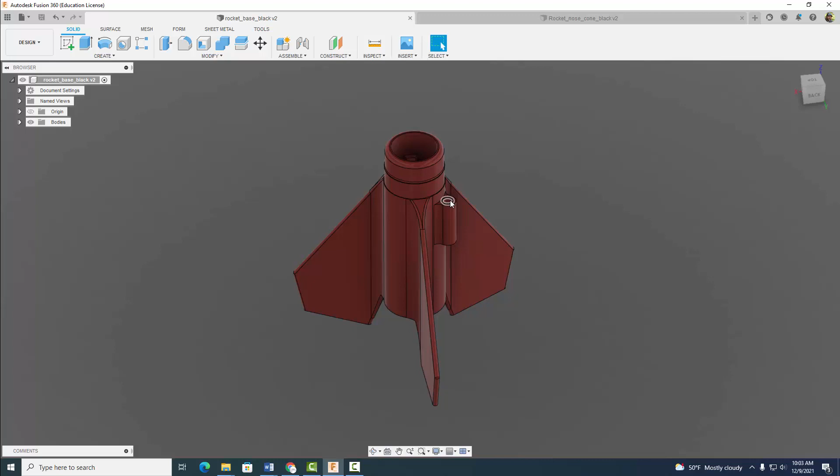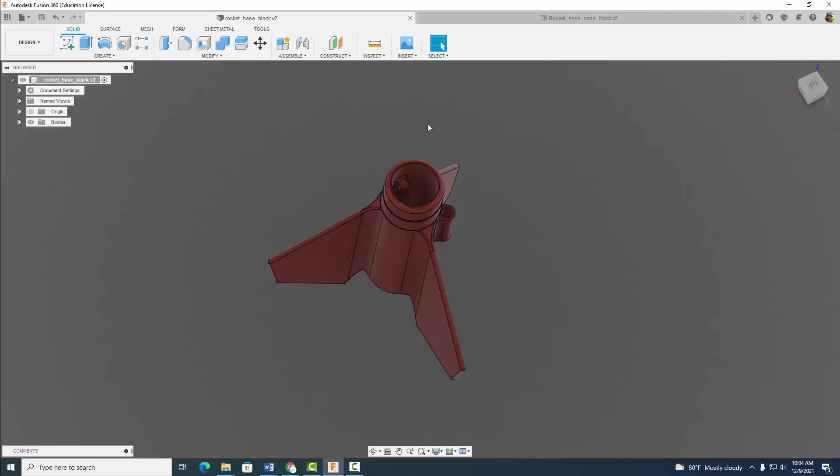The other mechanism we want to make sure that we have is this sort of stopper mechanism right here, or governor, if you will. And this will stop our engine when we launch it. When we put our engine in here, it'll stop our engine from moving up into our rocket. So this will act as a prevention mechanism so our engine does not shoot up into our rocket, and it will hold our engine in place. All right, so let's go ahead and get started.

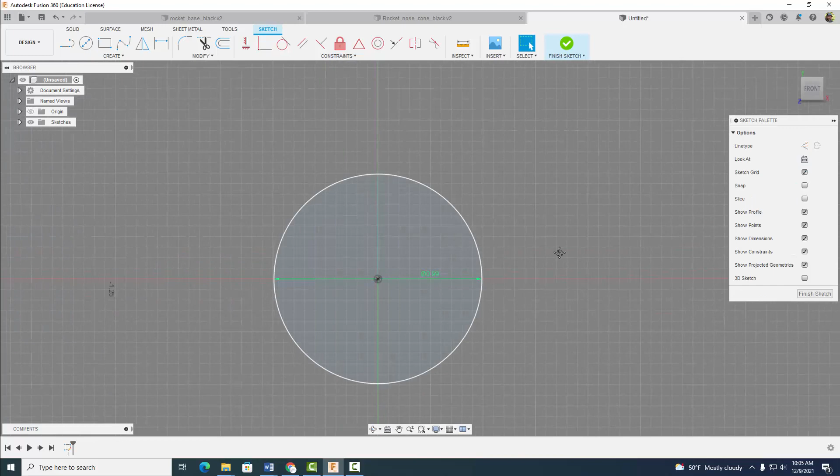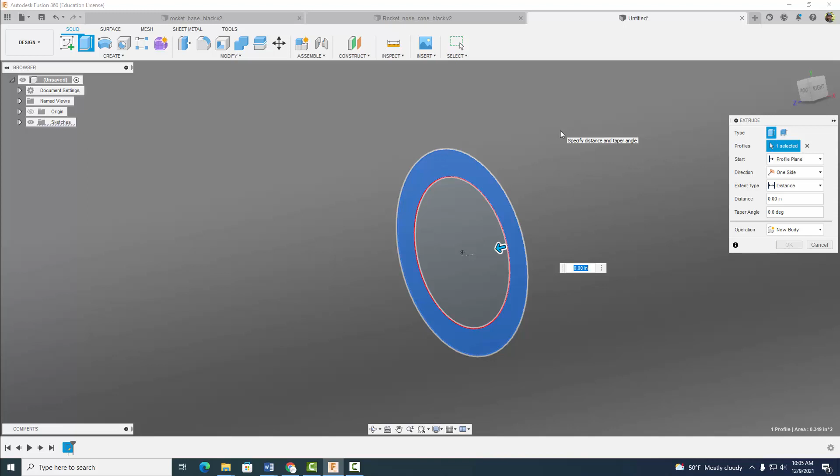Let's do a file, new design, and we're going to start a sketch on our XY plane. We're going to create a cylinder object here, and drag out a circle with a diameter of 0.99 inches. I'm going to zoom in, and then drag out a second circle with a diameter of 0.732 inches. We're going to finish our sketch, and it's important that you get this inner diameter right so our engine fits in it. We're going to extrude out this portion a distance of 2.4 inches. Hit OK.

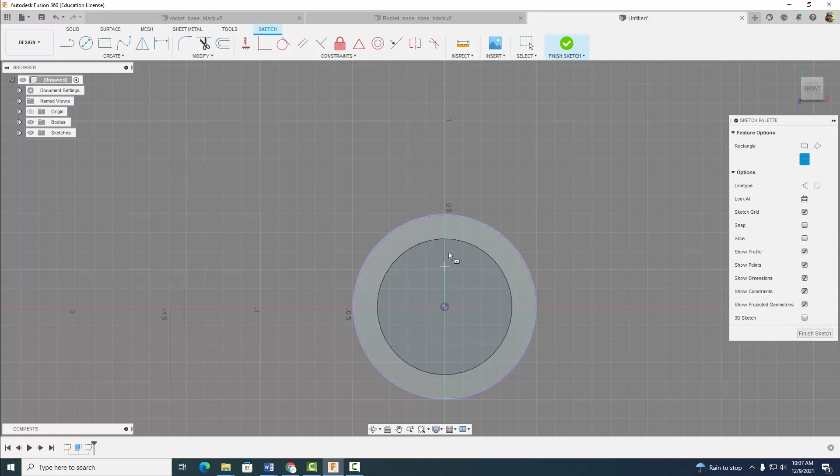Next, we're going to start a sketch on this surface, and project some geometry on this outer circle. Select OK, and then we're going to create a center rectangle. We're going to come straight up to here and drag out a rectangle that looks something like that. Then we're going to trim all of this stuff. And let's trim those two.

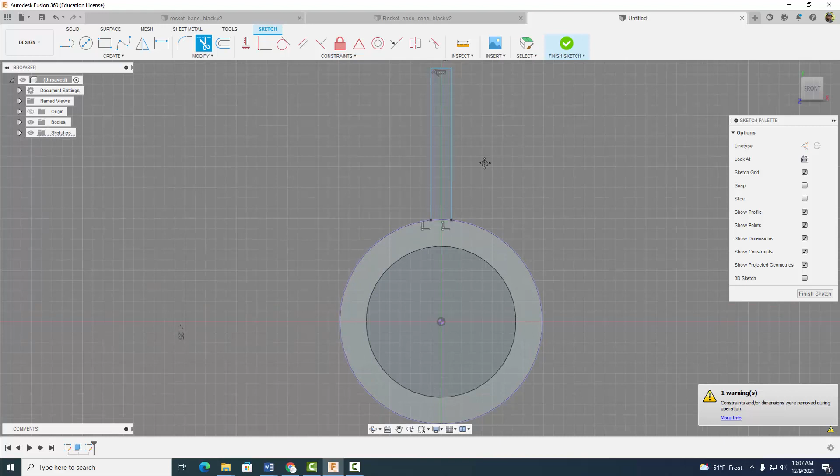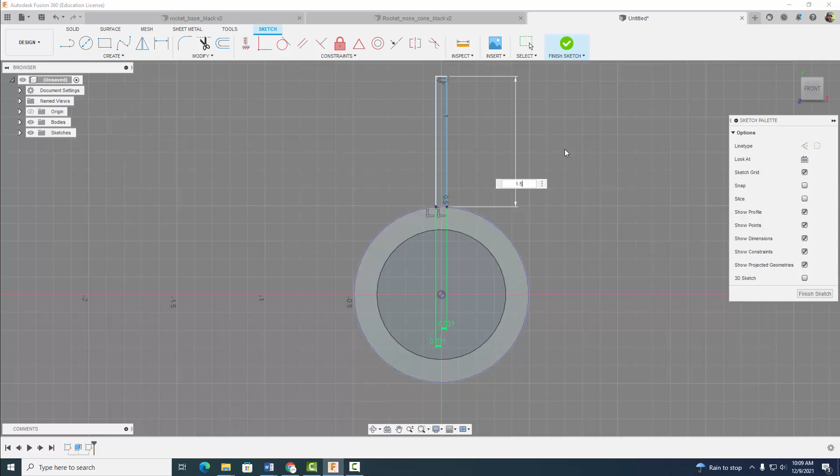The next dimension we're going to add is from this circle to the center here. We want this distance to be 0.0625 divided by 2, or 1/32 of an inch. Same thing on this side: 0.0625 divided by 2. Looks pretty good. Next we want to dimension from here to here. We want this distance to be 1.56 inches. All right, looks pretty good.

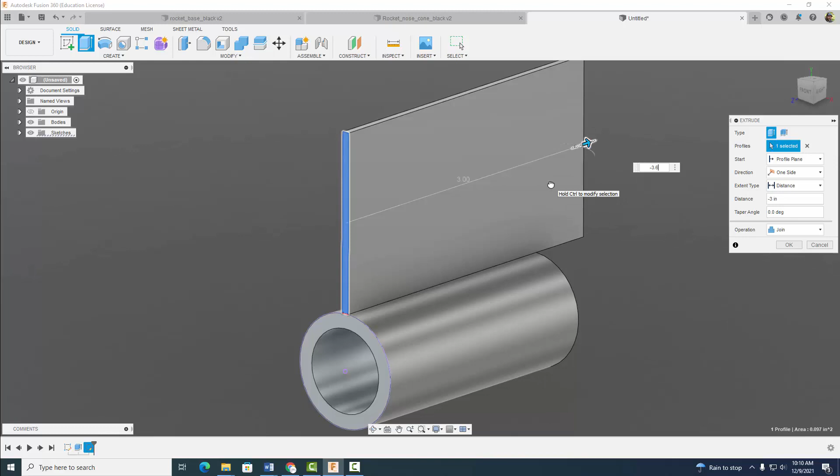Now let's finish our sketch, and we're going to extrude these squares out here. This is going to be one of our fins, and we want this distance to go the other way, a distance of minus 3 inches, and select OK. Now we're going to customize our rocket fin. You're probably like, well, I don't really want a big square looking fin. It's kind of ugly. So let's change that and make it look a little bit more appealing.

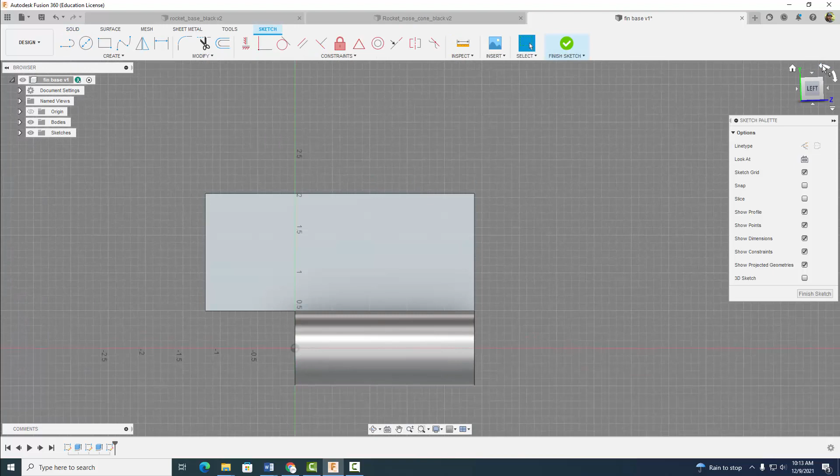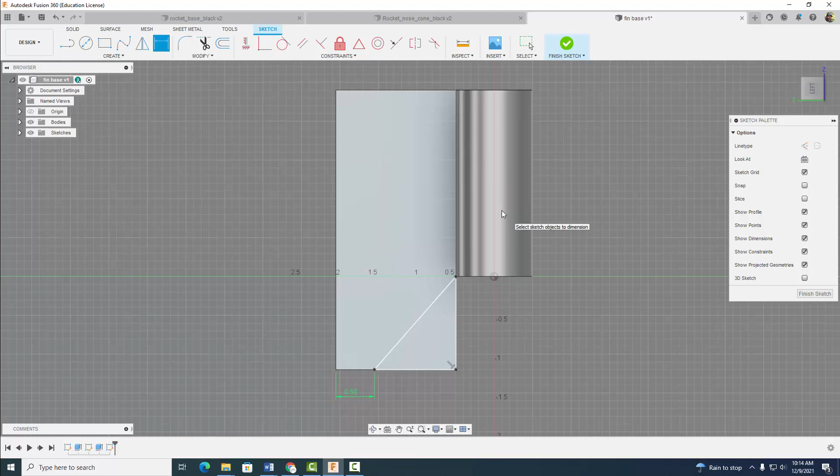Let's start a sketch on this surface. I'm going to rotate it around and project some geometry. That guy. I'm going to come with my line tool, find this point right here, come down over here, and draw out a triangle that looks something like this. I'm going to dimension this distance from here to here. Let's make that 1/2 inch. Then I'm going to finish my sketch, and extrude this guy minus 0.0625 inches and hit OK.

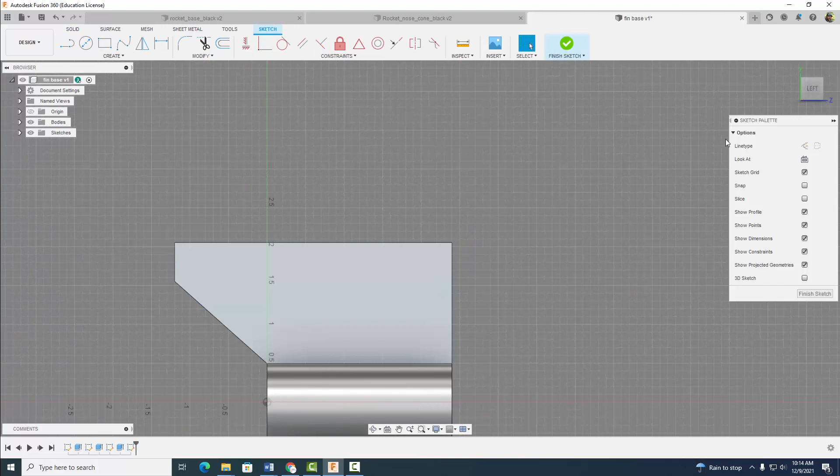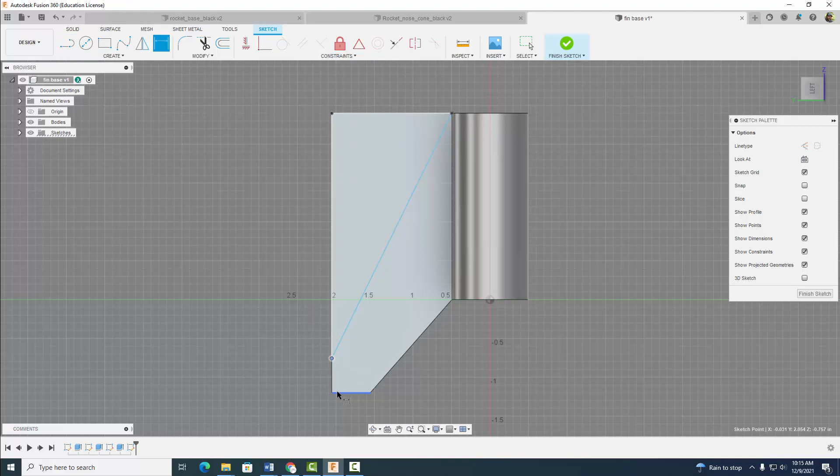Now let's make another modification on our fin. I'm going to start yet another sketch on the same surface, and once again project geometry. I'm going to grab my line tool, come up to this corner, and do the same thing down here. I'm going to come down, draw out another triangle, and once again dimension this distance to be 0.5. Finish my sketch, and then we're going to extrude and cut away this portion, a distance of minus 0.0625. Hit enter. So we have one fin done. Well, close to being done.

If you're in my class and you're making this rocket, you don't want your fin to look just like mine. You want your fin to be unique. That's where your creativity comes in. Create a rocket fin base that's innovative and unique and something that you thought of. All right.

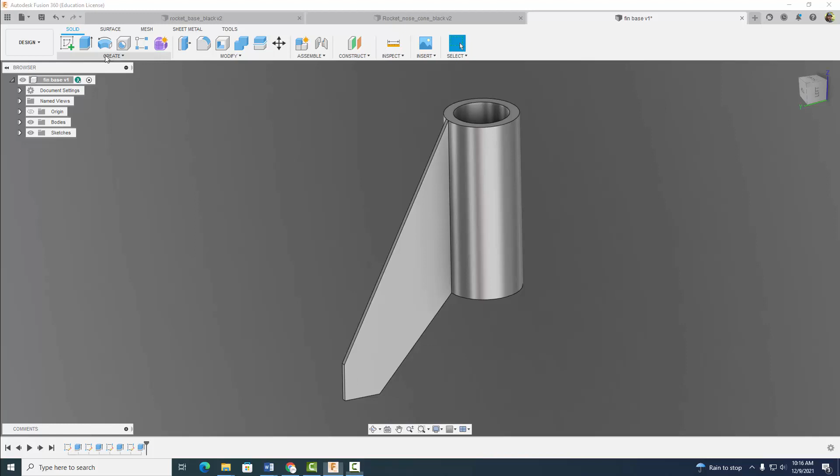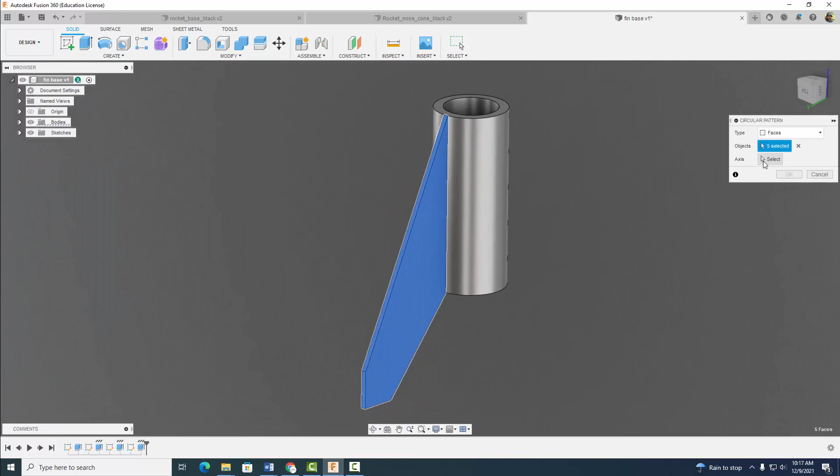And if you've ever looked at model rockets, you'll know that they have basically between 3 and 4 fins. I'm going to add 3. So I'm going to come over here to create and we're going to do a pattern. We're going to do our circular pattern and we're going to click on that surface, that face. Make sure you select face, that face, and that face. Okay. And then we're going to select our axis and we're going to select 3 and then hit OK. Okay, and now we have these 3 fins here on our rocket.

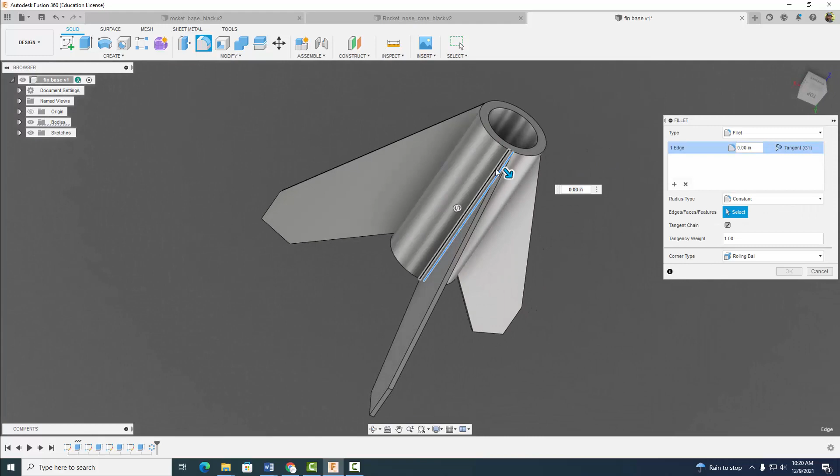Looking pretty good. And if you actually launch these, there's a good chance the fins are going to break. So let's increase the structural integrity of this guy, and we're just going to slap some fillets here around each fin just to make it a little stronger. And we're going to make those fillet sizes 0.125. There we go. Select OK.

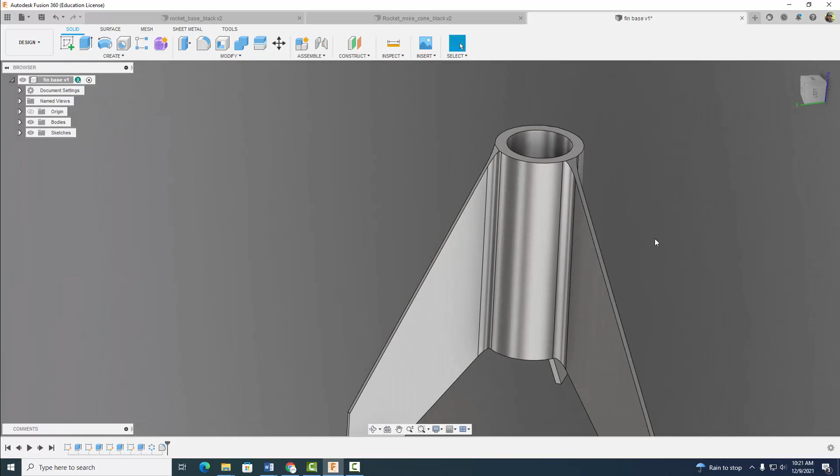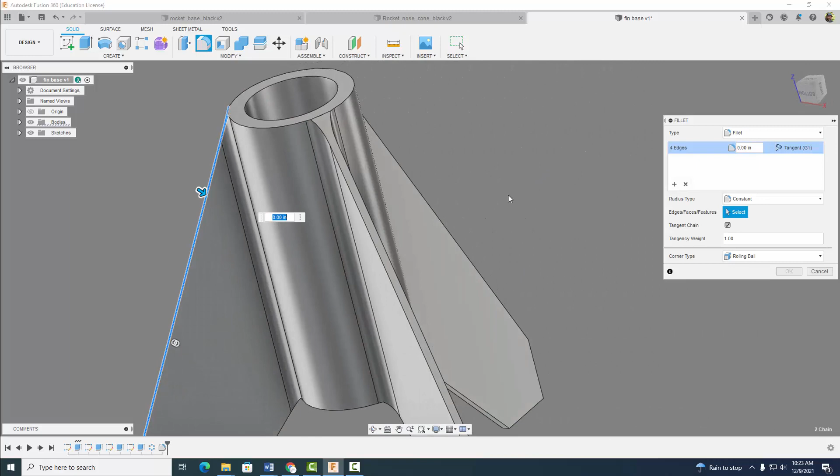And to make our rocket a little more aerodynamic, we're going to smooth out these flat surfaces here on our fins. So we're going to come on back to modify and we're going to add yet another fillet, one there, and we're going to make them 0.03. Okay, so I'm going to go around and click on all of them here. Looks pretty good. Select OK.

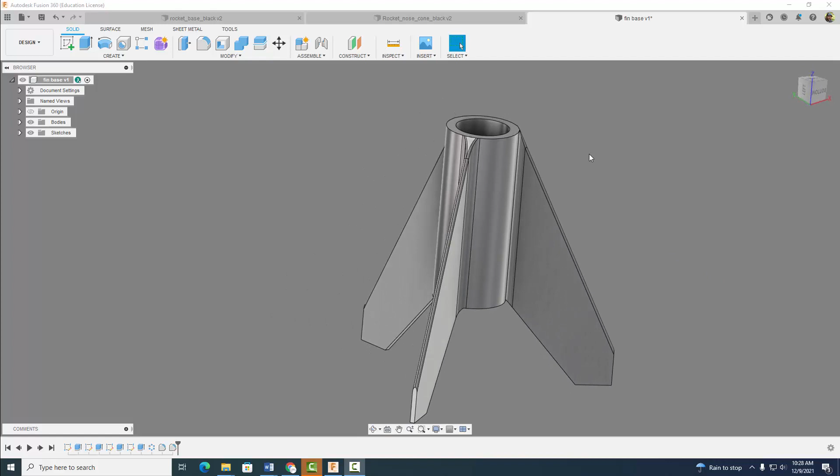All right, now you want to go ahead and create a launch lug so we can actually launch our rocket using the guide rod. So I'm going to start a sketch right here. Okay, and somewhere kind of out and over here. That's a little better. Actually, let's do it right out here, and we're going to make this circle have a diameter of 0.177.

Okay, and I'm going to come up to my tangent constraint, and I'm just going to make this tangent to that. Okay, and then I'm going to start here at the center, and I'm going to drag out another circle with a diameter of 0.25 and select enter. Okay, and I want to make sure this is equal distance between these 2 fins here. All right, next thing we want to do now is to center this guy so it's between these 2 fins. Well, we know it's 120 degrees between these 2 fins.

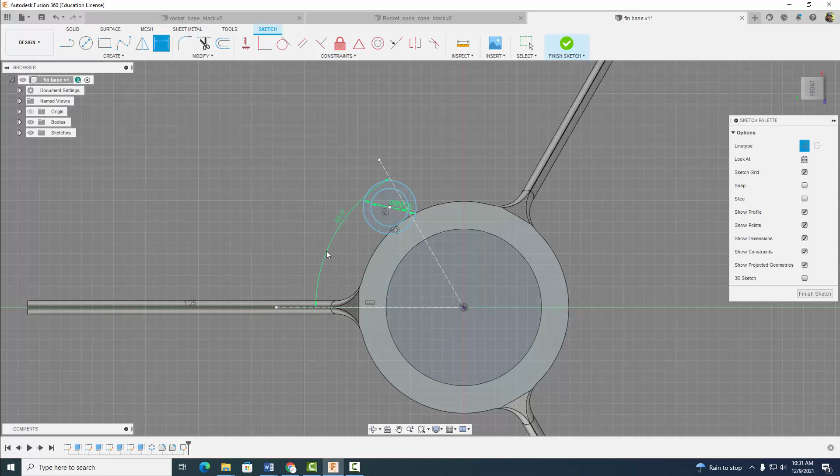So I'm going to click on my construction line here and I'm going to create 2 construction lines. I'm going to make one come out here. Okay, I'm going to hit escape and draw another one out here, and I'm going to dimension the angle between these to be 60 degrees. Enter. And then I'm going to come over here to my coincident constraint and I want to click the center of the circle and make sure it's on that line. And there we go. Now we know it's perfectly centered.

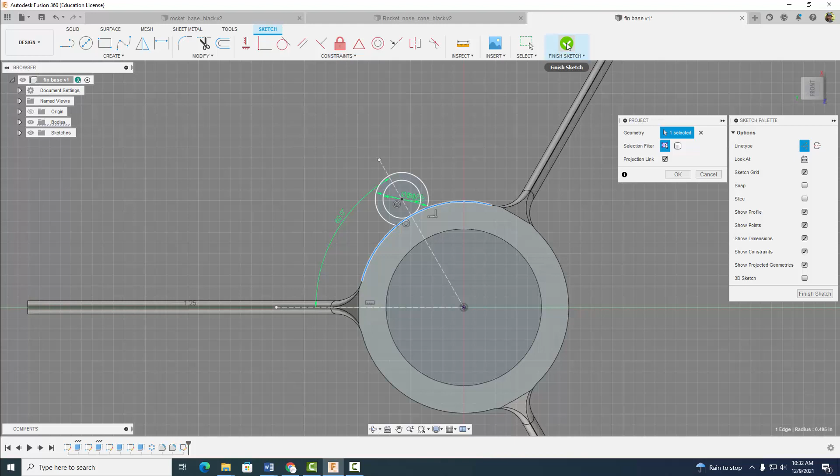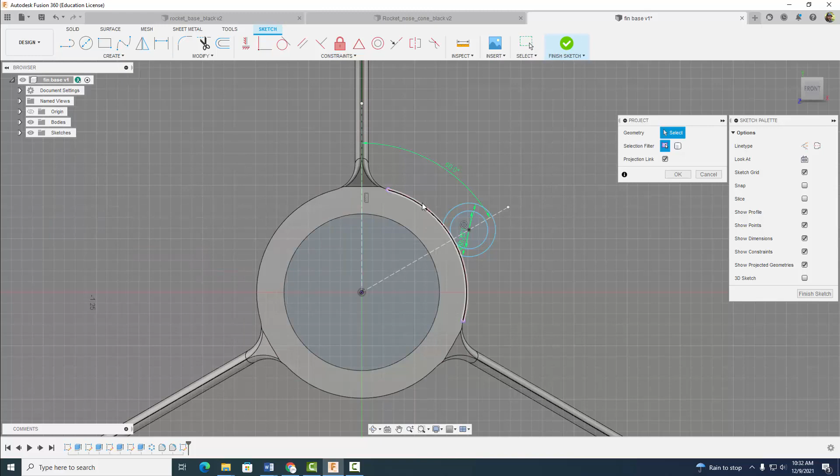All right. Looks good. I'm going to go ahead and finish my, actually no, I'm sorry. Let's trim that guy and that guy. I'm going to come over here to create and we're going to project this guy. We're going to finish our sketch. Actually, let me go back into my sketch. My bad. I made this a construction projection. So let's not do that. Let's project again. Make sure your construction line is off. Go to project and now do it and you should be good. Now let's finish our sketch.

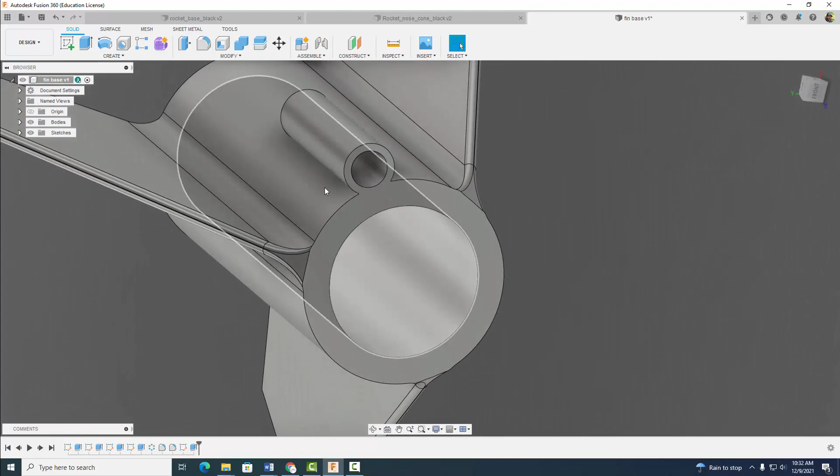Okay, and we're going to extrude this out a distance of 1 inch, -1, and select OK. All right, and then to make this guy a little stronger, once again, we're going to just put 2 fillets on there and we're going to make them with a distance of 0.125. Select OK.

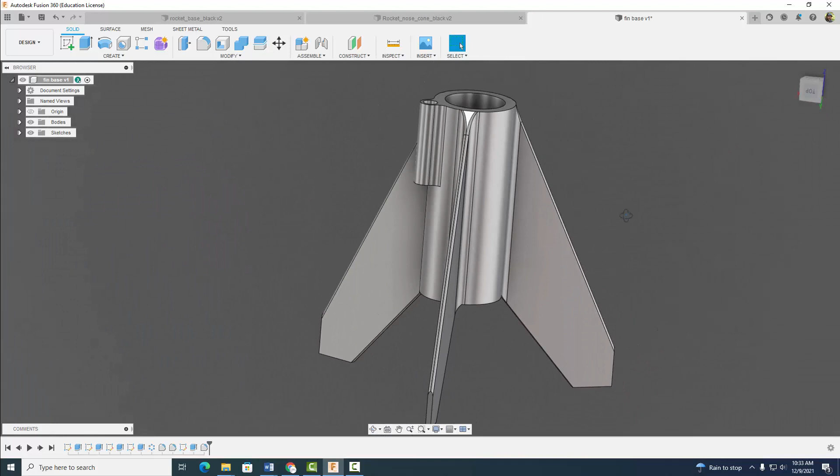Okay. It's very important that you design a launch lug so you can slide this onto the guide rod and your rocket has a perfectly vertical straight up trajectory. And you want to make sure this hole is definitely big enough. Okay. All right, and the next thing we're going to do is start a sketch right here on this surface. Okay, and again we're going to project some geometry.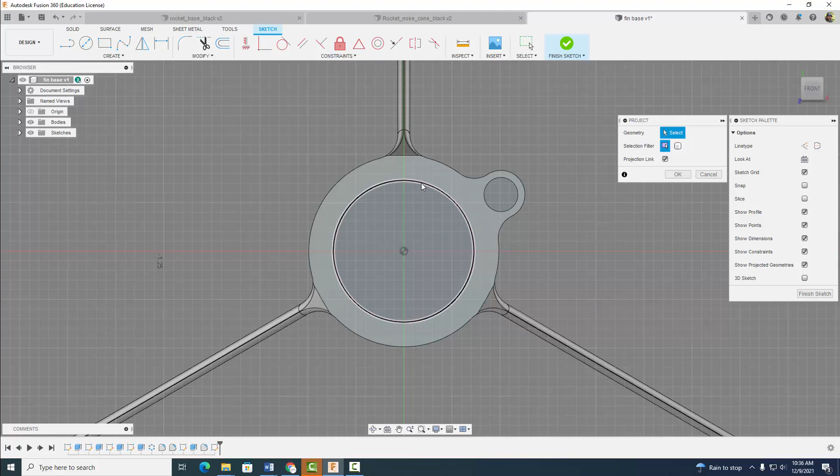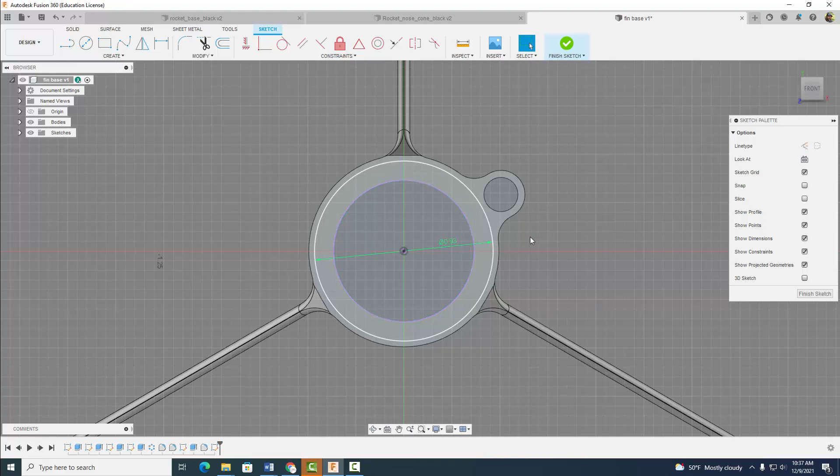We're going to project this circle, and then we're going to draw out another circle with a diameter here of 0.93. There we go. And it's very important that you get this dimension correct because this dimension will fit on that cardboard tube. It'll have a nice, good little press fit. If you don't, your cardboard tube might be too loose, and you might have some issues. So after that's done, let's go ahead and finish our sketch, and we're just going to extrude this portion out right here, a distance of 0.67 inches.

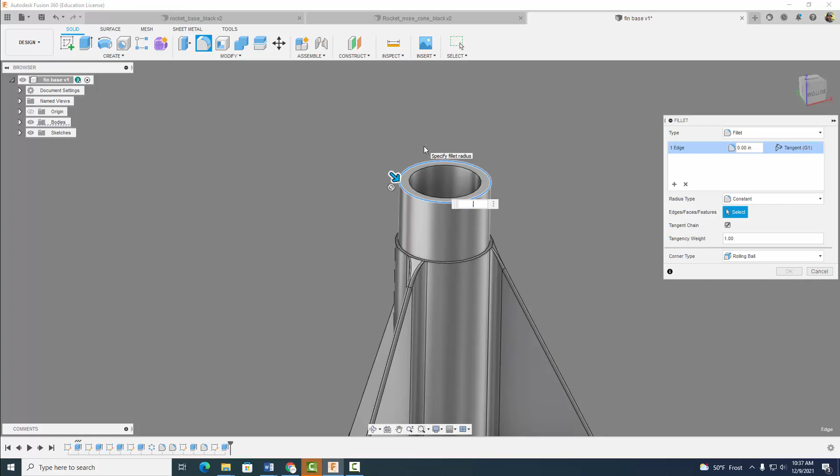Select OK, and like I said, we're eventually going to slide a cardboard tube over this. To make it a little easier, we're going to round this edge off with a 0.125 fillet. Hit OK.

Now we're going to create this little rib feature here, so when we slide our cardboard tube over, there's a nice seal, and it stays on very firmly attached to our model rocket base.

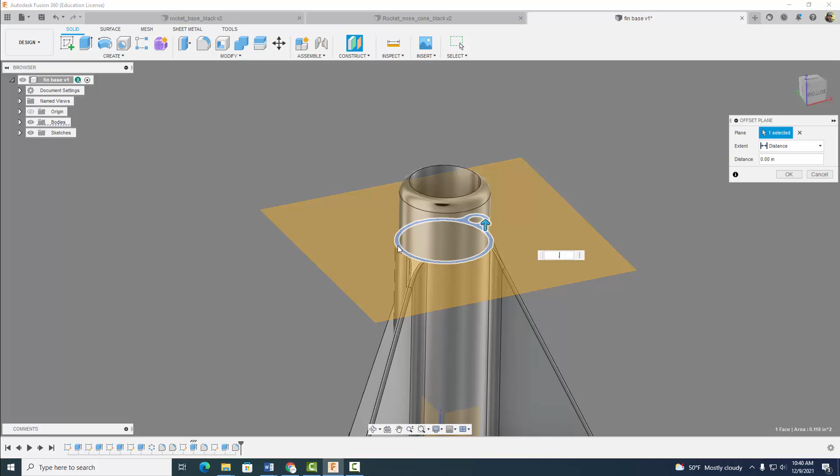I'm going to construct a plane offset from this one, a distance of 0.3. I'll start a sketch on that plane, project some geometry, that circle, and draw out another circle.

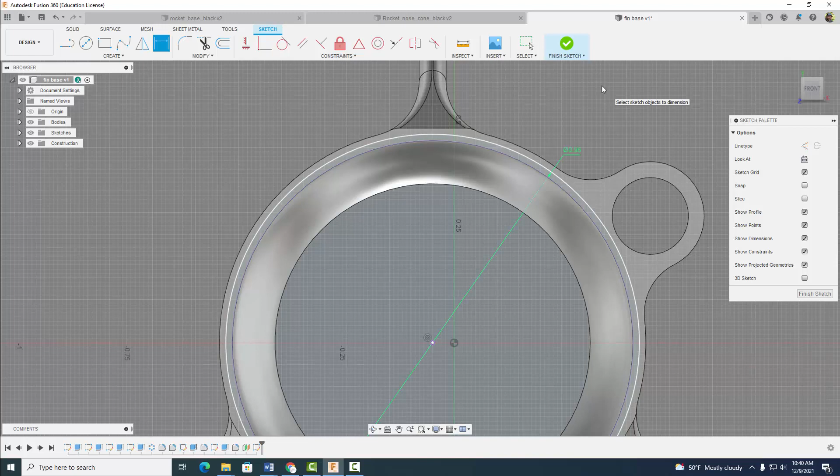I want this diameter here to be 0.96 inches. Now let's finish the sketch.

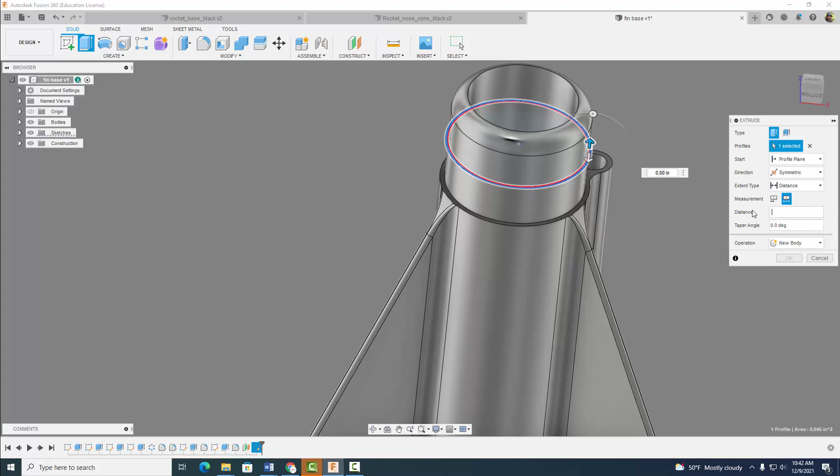Now let's extrude this little tiny feature right here. I'll click right there, go symmetrical, click on whole length, and do a distance of 0.03, then hit OK.

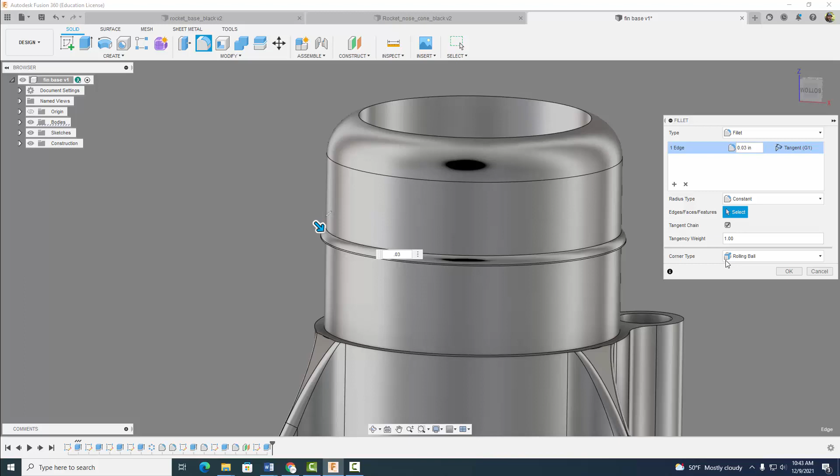This is kind of an abrupt edge here, so let's smooth it out so our cardboard tube slides on with ease. I'll click right there and make that 0.03, then hit OK. Why are we doing this? So when we slide our cardboard tube on, we get a nice press fit, and the tube won't slide off this piece.

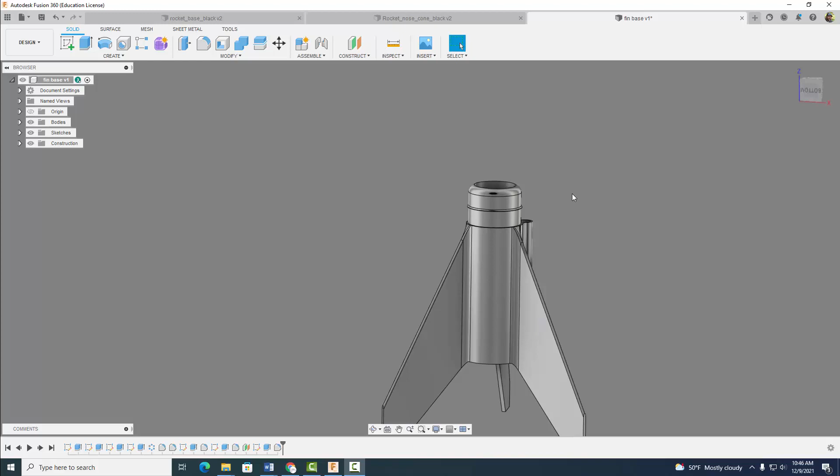So when we go to launch it, our rocket doesn't fall apart, and everything stays on with a very firm, tight fit. Next, we need to create some sort of stopping mechanism for our engine. This is very important for my class when we launch these, so your rocket stays in place.

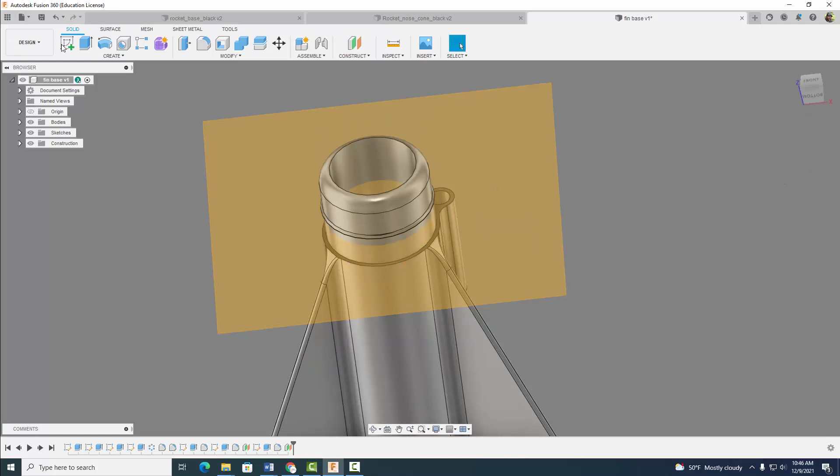To start making this, we'll do a plane offset from this surface, a distance of 0.2 inches. Select OK, and start a sketch on this surface. I'll zoom in, come down to create, and project again this line right here.

We're going to come over to a 2-point center rectangle. I'll start it right here and draw out a square, something like that, and then we'll trim this stuff.

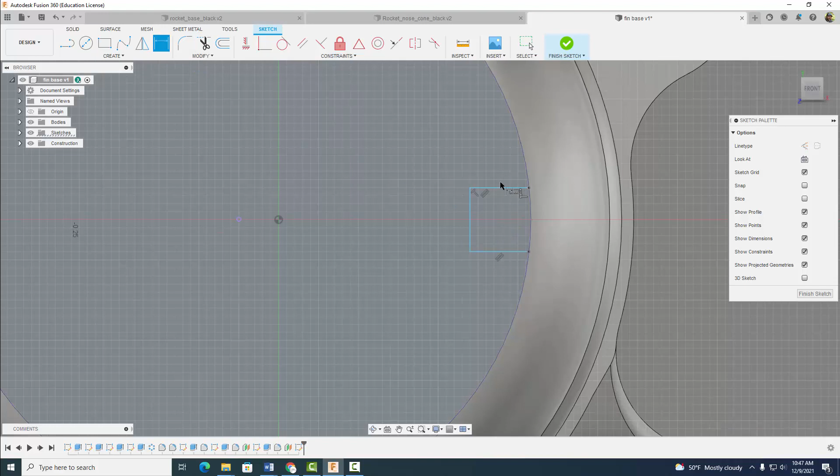Now we're going to throw on some dimensions here. We'll make this dimension from here to here 0.06, and the same thing on the other side so it's symmetrical, 0.06. From here to here, our center, we'll make that distance 0.2. Enter, and that looks good.

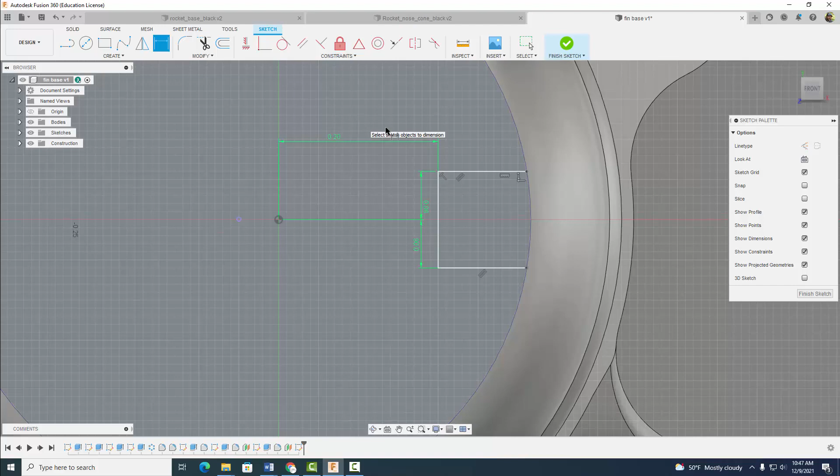Let's finish our sketch and extrude this guy out now. Once again, symmetrical both ways, a distance of 0.15, hit OK, and then we're going to add some fillets.

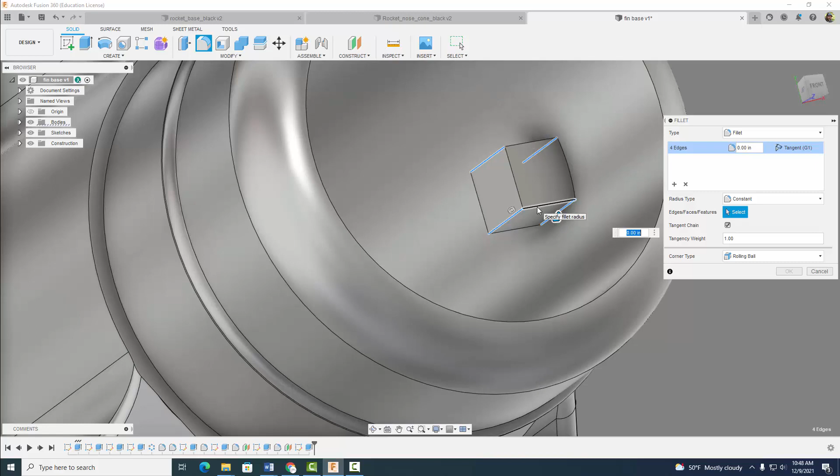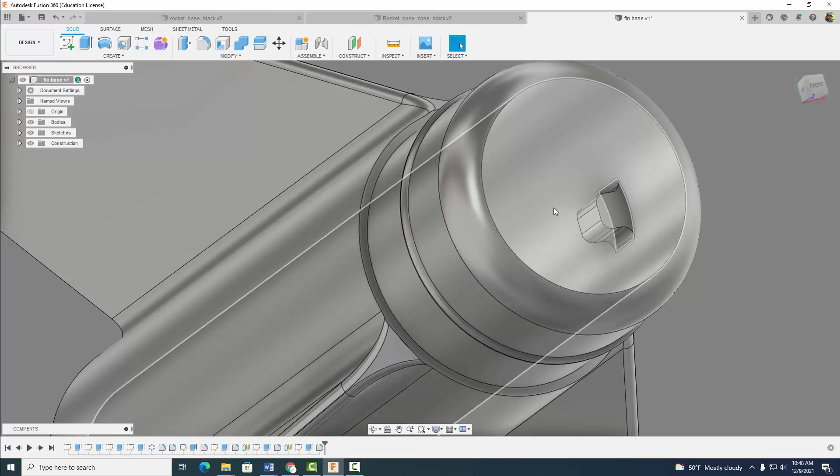Right here, right here, right there, and right there, we want those fillets to be 0.035 inches. So it looks something like that, and we want this piece strong so we don't want it to break off. When we push our rocket engine in here, it will rest up against this feature, preventing our rocket engine from moving around. So it's a very important feature.

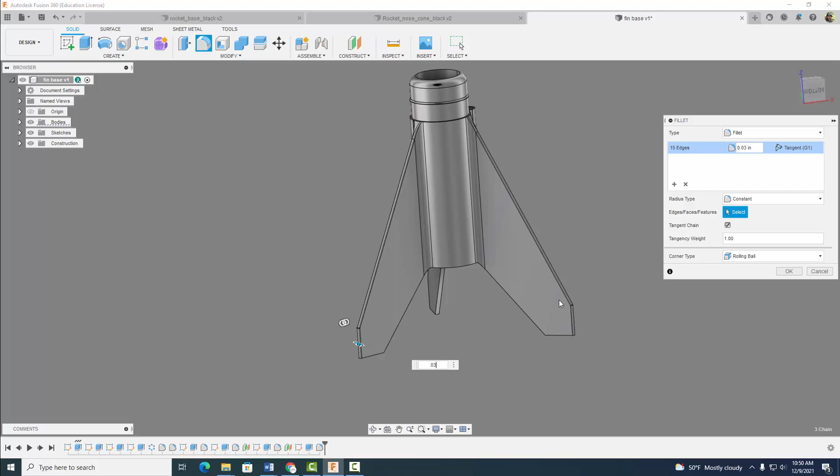Finally, just to be consistent, I'm going to add one more little fillet on these edges right here, and we'll make those 0.03. I'll hit OK.

Now we're looking pretty good. If you're 3D printing, you definitely want this surface flat so you have a nice flat surface to print with, because if it's a pointy edge, it won't print well. You want a little bit of surface area here, so we're going to leave those flat.

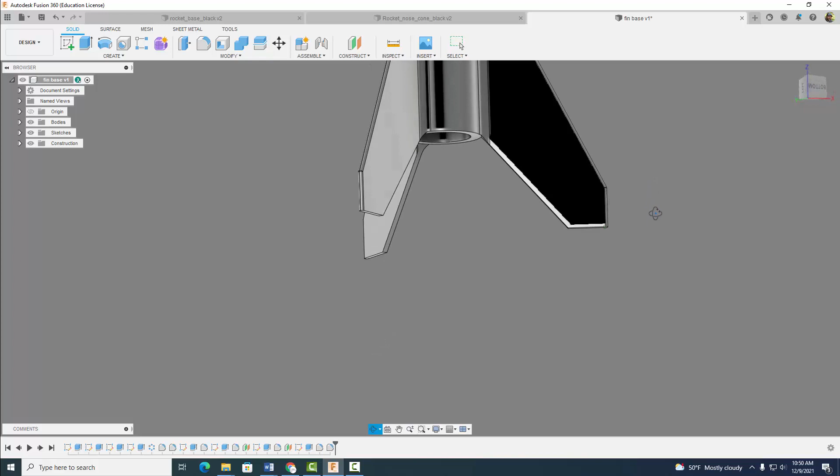Finally, when you're done, don't forget to save it, but also come over here to modify. We're going to give it a physical material of ABS plastic, go to plastic, drag ABS plastic over, select close, and to be consistent we'll make it red just like the nose cone. Hit close, and of course save it when you're done.

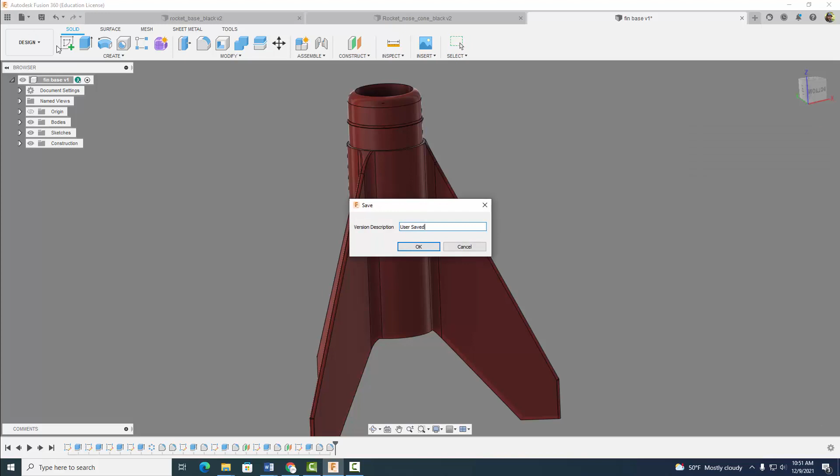And there you have it, a nice looking model rocket fin base.